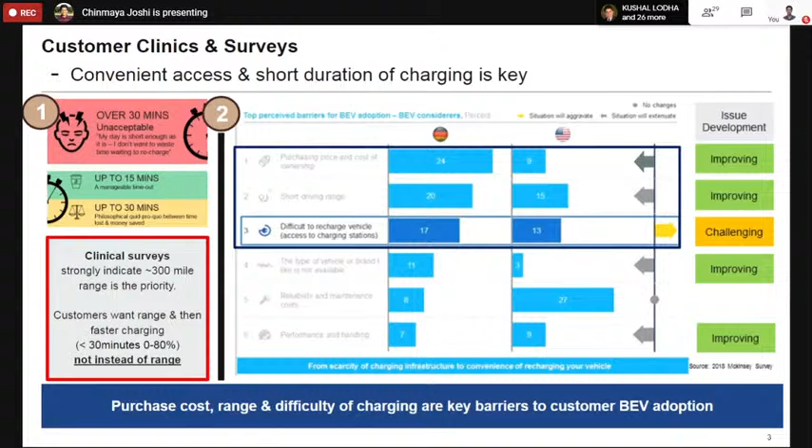So some of the evidence from early surveys that BMW, Nissan, Porsche, Audi have all come together to do is around where and how much charging people do. So typically in a household setting or a workplace setting, household as in when you buy a car, you're naturally given an option to install a charger at your home. Or if you're working, you typically go in and you park your vehicle and plug it in. It's nowadays a very common scene in most of the Western geographies.

So those typically range between 3 to 22 kilowatt. So that's AC charging. It can either be a slow AC charge, it can be a fast AC charge. Then there is DC charging as well, which typically you won't find in a household setting, but it would be in your workplace or places where you go for spending more time, like shopping malls and hotels and any other hospitality areas, or consumers in urban fleets such as Uber or taxi fleets. So those are typically ranging between 20 to 25 kilowatt, and the typical charging time there is 1 to 3 hours.

And then there is fast charging stations, which are basically centered around retail parks, grocery stores, smaller restaurants, etc. Those will charge about 80% of your vehicle in 90 minutes. And then there is HPC, very high power, very expensive to maintain, starting from 150 all the way to 350 kilowatt, very high DC power, which basically will charge your vehicle under 15 minutes.

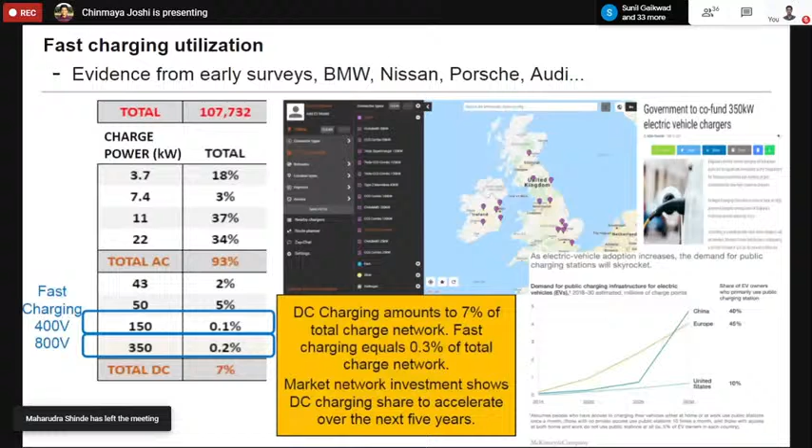With 800 volts, that mark goes significantly higher to about 4.5 kilowatt hours a minute, which is almost twice that. So you can achieve almost twice the amount of charging with the same infrastructure, but at a higher voltage. So even with AC charging, if it is at 800, you would be able to achieve a much higher performance on your charging system.

So below are some of the estimates and the actual numbers of some of the OEMs. As one can see, an average OEM as of 2021 will be centered around 2.1 to 2.3 kilowatt hours per minute. Tesla is already ahead of that with 2.5 kilowatt hours a minute.

And the industry leader at present, although I think this slide is a bit outdated now, is Lucid Air. But when the slide was made, the industry leader was the Porsche Taycan at 4.6 kilowatt hours a minute. Lucid Air currently has the market's leading charging system adopted on a vehicle, which is about 5.3 kilowatt hours a minute.

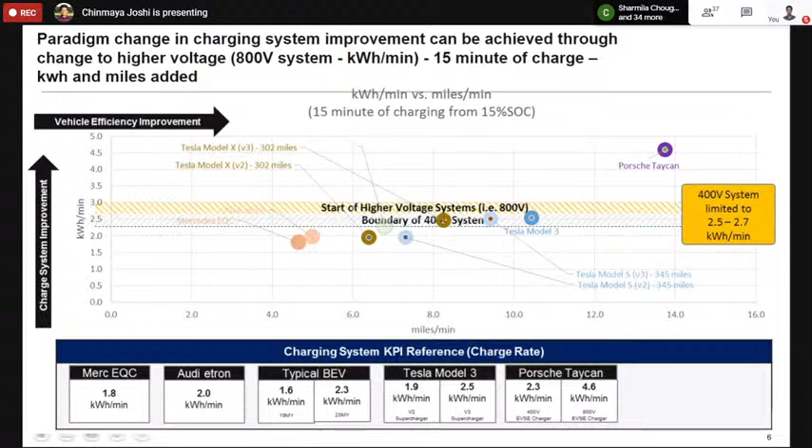So the point is, as the efficiency of the vehicle improves and as the charging system improves, we would be able to offer customers a better charging performance at the same cost and with the same infrastructure. So the idea is to try and hit a 15-minute target as fast as we can in order to continue our foray into electric vehicles going forward. That's the target we work with.

So what are the other advantages that we have with increasing efficiency? Today, when a typical consumer charges the vehicle, the biggest problem with battery electric vehicles, when you charge the vehicles or leave the cars on standby, is not actually with the high voltage battery. It's actually your low voltage battery that goes flat. And that has been a major issue across all OEMs. Take Tesla, take Jaguar, take Land Rover, or even a Volvo or any other vehicle, even if it's known for reliability.

The reason for that is power electronics requires significant cooling to keep it steady. Charging will increase temperature. It activates the fans. And if a vehicle in standby has cooling fans going on, it drives the low voltage battery almost flat. And that has actually been a big warranty increase on vehicles. The major reason for that is power electronic switching increases temperature at the junction, causing fans to go on.

And that has been an issue that the cooling system has not been able to cope with, because even to activate a cooling system, most of the premium architectures will be on an HVAC-enabled water glycol cooling system.

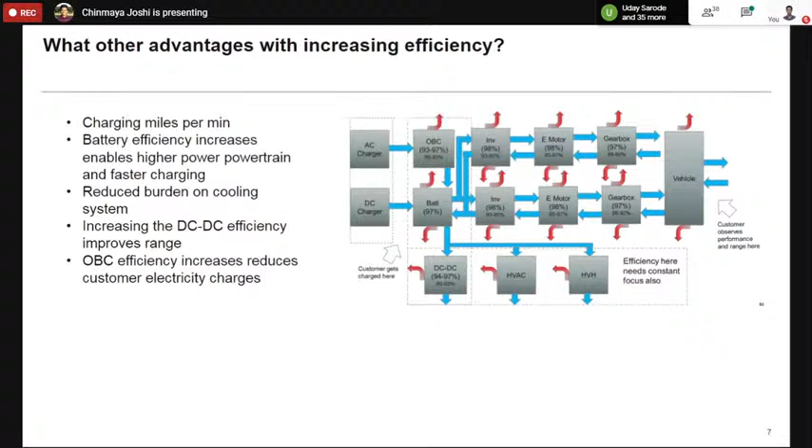The other issue is that with increasing inductance, you also have an issue of transient voltage, which is giving us a lot of problems in field as well as all OEMs, causing componentry to go out because of high current inrushes. So with voltages going higher and higher, one, we will be able to give more performance, but at the same time, the current reduces, therefore reducing our risk towards effects like transient voltage issues on the vehicle, and therefore warranty spend on components, and also recalls around that.

Moving to the next section, so I tried to talk about what are the typical expectations of the consumer on charging time, what evidence do we get, what is the utilization, and how does shifting to 800 volt offer better. Now, I'll talk about the 800 volt system. I'll first talk about the platform in 2020, then I'll talk about 2025, then I'll explain the difference between a battery electric vehicle and a plug-in hybrid, because I think battery electric vehicle is still not mainstream across a consumer's purchase interest. They would typically go for a plug-in hybrid even today. And there's a difference to how both are progressing.

One is moving towards higher efficiency, higher performance, and the second is more moving towards cost focused, trying to reduce costs as much as it can so that they can package more and more of range and features along with the IC engine into the vehicle. And it's a simple logic there again, because with a plug-in hybrid, you have your electric traction system and your ICE traction system, and you want to offer both at almost the similar cost of a diesel. So you will have to despec both of them. So you won't be able to really optimize either of them to premium performance.

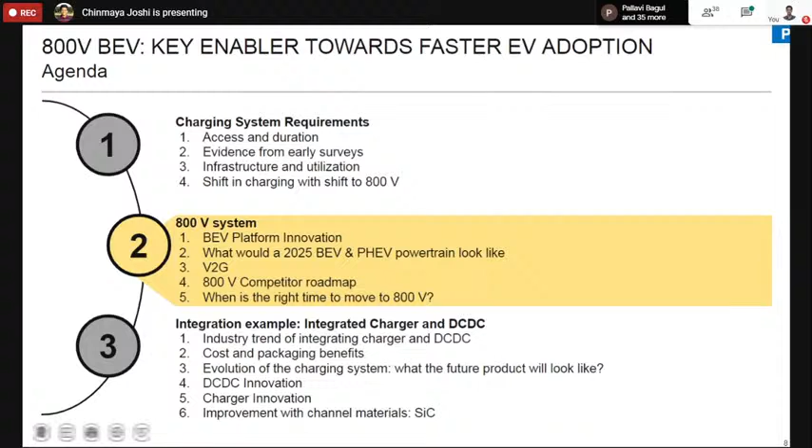Then I'll talk about vehicle to grid and how it's posing challenges for design and what it means in terms of costs. And I think these three topics will also try and give some direction to why I've chosen the example of charger later on, which is the onboard charger and DC-DC. And I'll then talk about the competitor roadmap, which is basically how different OEMs are approaching this topic, what are the typical timeframes, which models are coming across on these architectures. And towards the end, I'll quickly show through a drawing what's the right time to move to 800 volts.

And then you have your components, which are all distinct. So you have a different junction box in which you get your DC link from the battery. That has a connection to your onboard charger. You have a separate DC-DC system.

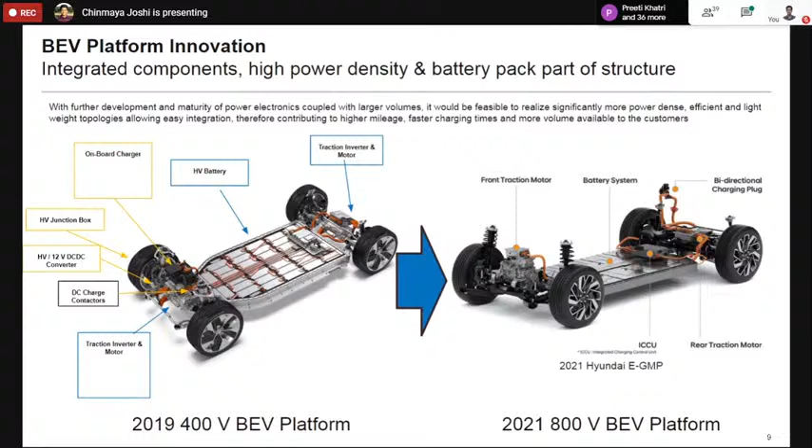Lucid Air is the vehicle that has been in talks everywhere, and it's been a proper case of innovation across all components. Before Hyundai came with the cost optimized future platform, Lucid is more of a premium advanced platform. It sits on a 900 volt architecture. It offers about 1000 horsepower of traction power. And just to give a typical comparison, a standard Honda vehicle is about 120, 130 horsepower. So we're now sitting with 1000 horsepower with an electric vehicle sitting at 900 volts.

It's available at the same cost of a Tesla, and they have integrated exactly like what Hyundai has also done, which is the batteries part of the structure. You no longer see inverters here because they are now integrated as part of your machine. Those are now called compact drive units.

The planar architecture is taken off and only the control board sits outside. The power board is actually integrated in the motor housing itself. So you have your power board, you have your rotor, and you have your transmission on the other side, all sitting in one axis rather than your inverter sitting on top of your rotor.

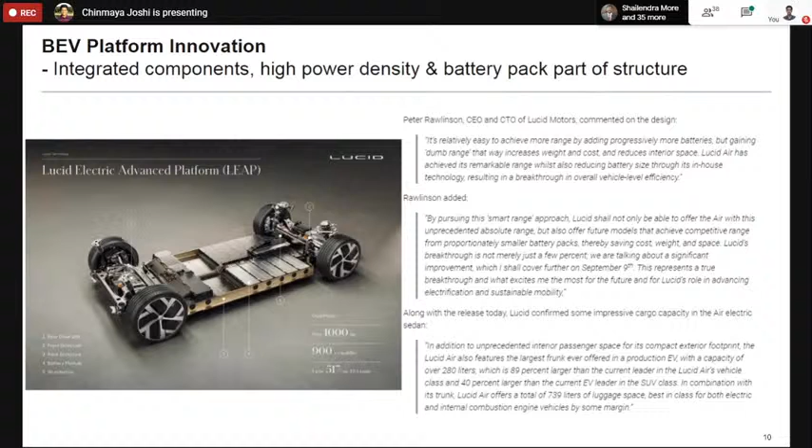Now, what would a 2025 electric vehicle look like? By 2025, we anticipate we would have to offer both 400 volt and 800 volt capability on the battery pack, which means that you would have a mix of charging, which is both 400 and 800 volts. What that means for the vehicle, and this will also give a good idea of how we have to design our componentry to the attributes.

So the consumers would have a mix of 400 and 800 volt architectures and infrastructures available to them, which means our contactors would have to be switching between creating a 400 volt configuration on the battery and an 800 volt configuration on the battery. And based on understanding the infrastructure, our communication has to get the contactors to align and realign and allow the charging to happen, to try and give the consumer as much benefit as they can with the infrastructure that they have.

So as you can see, because the infrastructure is complex and difficult to raise, it is also increasing complexity on an OEM to design the component to meet both 400 and 800 volt systems. With chargers, we still see, as I said earlier, AC charging is dominant, and even with DC, most utilization is under 20 kilowatts. So 11 kilowatt OBC is the standard being used and will continue to be standard. Everything above that will be an option fit. I explained option fit earlier.

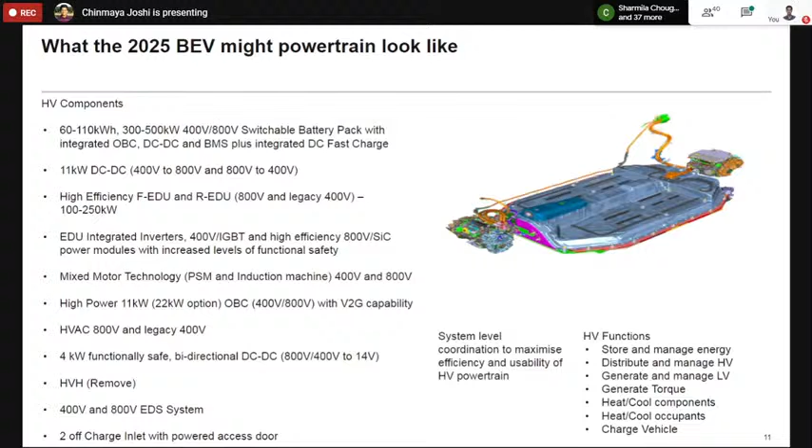Now we'll look at the PHEV vehicle, which is a plug-in hybrid. So this is going to be slightly different. The industry estimates that it will be still at 400 volts. The charging system still will remain 11 kilowatts as per the use cases. The rating of the machines will go down to about 60 to 80 kilowatts at 400, and that's primarily because the PHEVs will be used only up to about 40 miles per hour speed limits, and then the ICE engine will kick in, and that's primarily because of cost reasons.

Because the higher the kilowatt, the higher we'll have to spec our switching MOSFETs, and therefore the power boards will start getting costlier. It's a very linear relation of dollar per kilowatt. As your kilowatt goes up, your dollars will go up on the component. So I think there will be cost cutting starting to come there on the kilowatt rating of your machine, and with the new work happening with suppliers like GKN and ZF, the transmission on the IC engine itself is having this 60 kilowatt machine being packaged into it.

And the benefit of that is at cold start, you can start with your machine. Today, you still need to rely on a starter motor in minus 15 degrees Celsius. You can't use your machine because it is belt driven. So if you have your machine integrated in the transmission, you don't need a belt. Therefore, you're able to delete your starter motor and other components which take a lot of current, a lot of wiring system burden of your car.

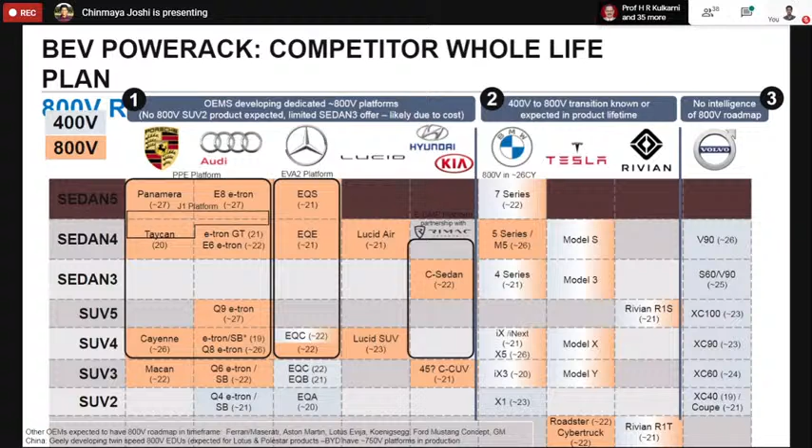Same is with Hyundai. Volkswagen goes very high, 10 million, because they've got Porsche, Audi, Lamborghini, all those brands with them. Lucid is a very, very premium brand, so they will sell at higher cost than most of the other architectures. And that's a major driver towards achieving 800, the cost today.

But the other element is when we move to 400 volt silicon carbide, you also get about 3 to 4% improvement in efficiency, and that contributes to 3 to 4 kilowatt hours of battery. And each of that contributes to 300 to 400. Now, where does that number come from? It's not just the cells, it's your packaging, your manpower, your assembly, your structure, weight, efficiency, all of that put together. The net impact on the car is 300 pounds.

That's basically 100 pounds per kilowatt hour, typically the impact that you have in around 2025. Today, it's even higher, about 180 pounds. But this number also includes the reduction in the cost of cells. And with that, we look at 100 pounds as typical per kilowatt hour. With every 1 kilowatt hour less we have to spec the battery, we save 100 pounds on the vehicle. And that's a very important number for an OEM.

But when we move to 800 volt silicon carbide, which is not available right now, the cost goes even lower, because then the current goes down. So the creepage clearances and all other areas around silicon carbide packaging are significantly reduced. So that 400 increase now comes down by 600. So we start saving 200 pounds on a vehicle. Compare number 4 with number 1, we actually start saving 200 pounds per car, but that's still far away. And silicon carbide cost reduction is moving steadily along as the dies become more and more efficient.

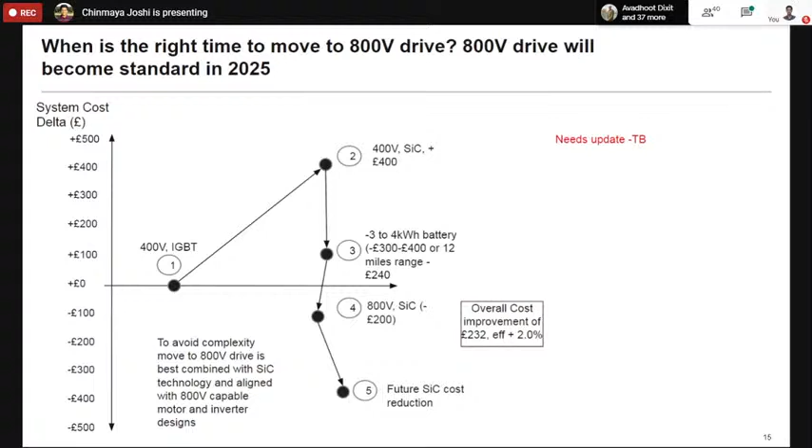With silicon carbide, you can achieve more efficiency because the channel width is high, so you can have more electrons flowing in your channel as compared to silicon. So I'm just trying to give a simpler explanation, although one can spend more time. But moving on, I just had a video that explains about an upcoming platform.

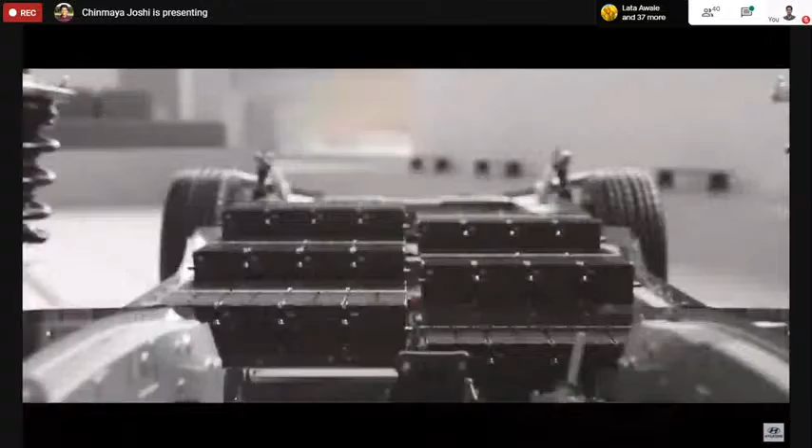See, only the battery packs are packaged. There is no battery management system. It's only the cells, and they're part of the structure.

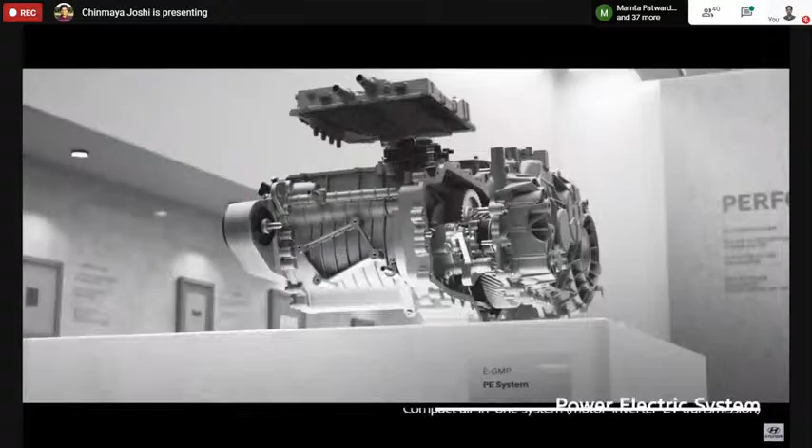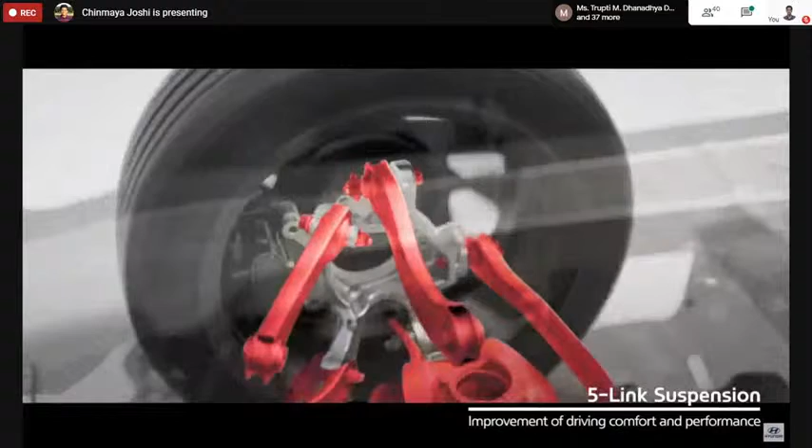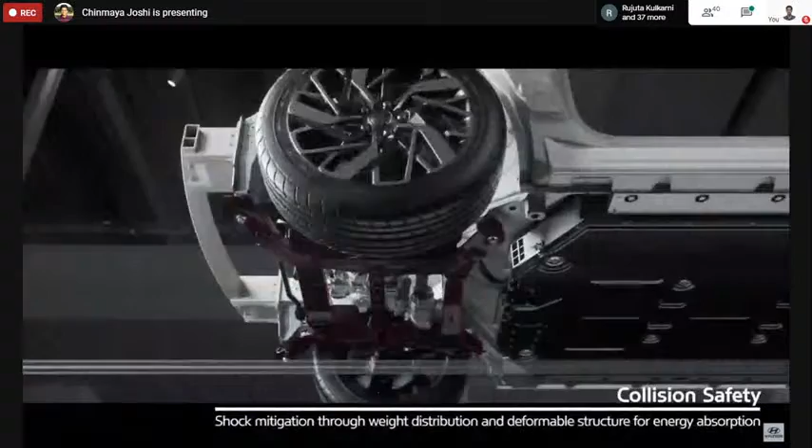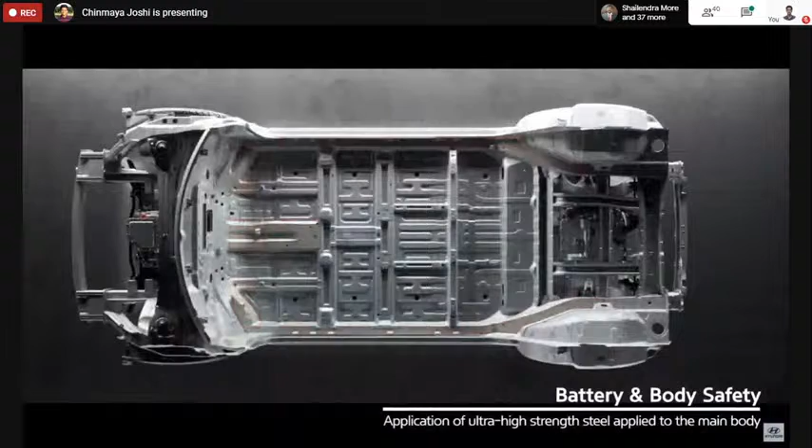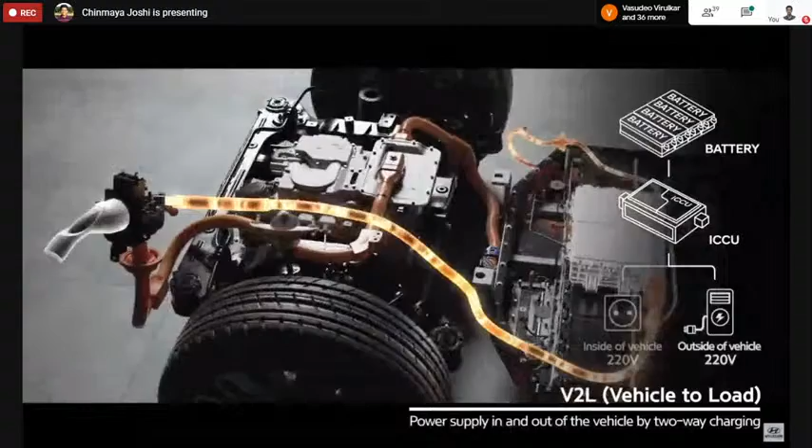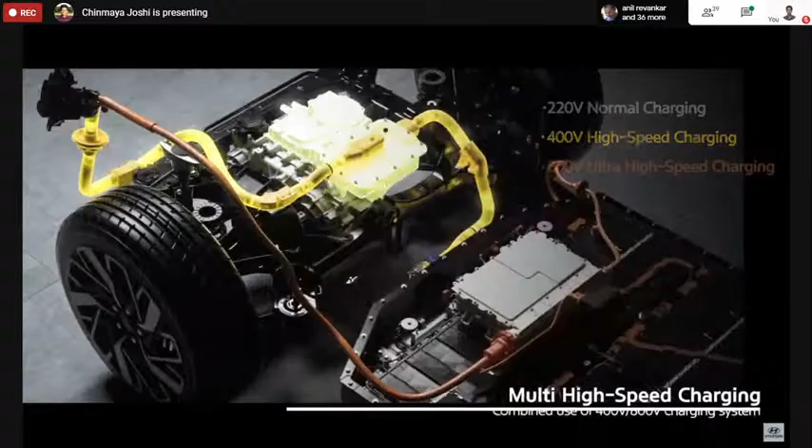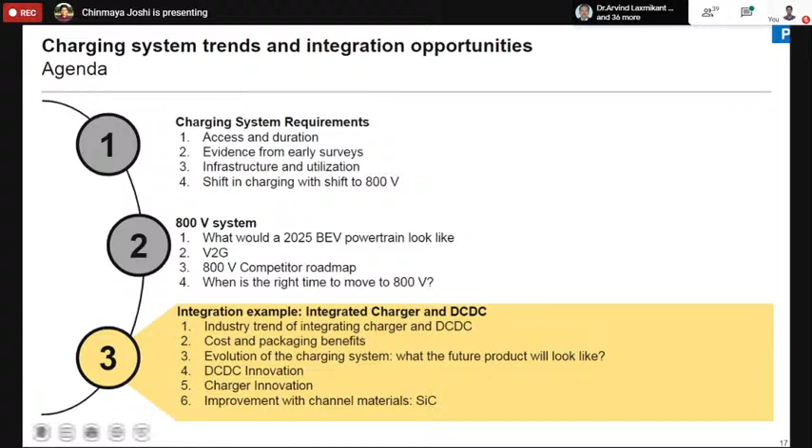Right, moving on. So I'm coming to my last section, which is a case study of an integration example. If you saw in the last part of the video, it talked about a charger and a DC-DC supporting 400 volts, 800 volts, feeding back to the grid. And I'm going to explain a little bit on that as a case study. Why is there an interest in going towards an integrated charger, DC-DC, or a BMS as well?

So trying to eliminate the harness improves cost. Cooling connections become easy if you have just one cooling plate across your components, and having just one microcontroller rather than different microcontrollers. For example, today you have a separate microcontroller for a charger, a separate microcontroller for a DC-DC, and a separate one for your battery management system. So all of them have to talk to each other.

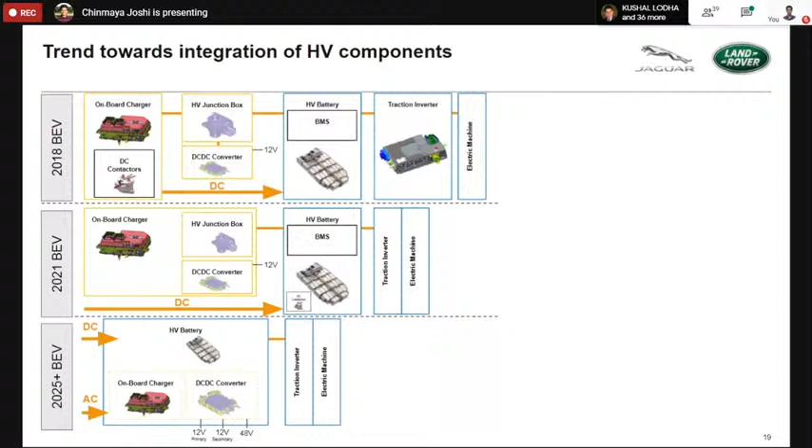This is a typical block diagram of what I was talking about. So your onboard charger, your DC-DC converter, your BMS and master control across your onboard charger and your DC-DC will all be integrated inside of one box. That would include your contactors as well. And the master controller will also define how the contactors align and realign to change the configuration of the battery.

So the bus bars on the battery will change as the contactors change their alignment inside this box from 800 to 400 volts. So this shows the AC charging use case and your DC charging use case into the contactors, AC charging directly into the onboard charger, converting AC to DC and going into the battery, with your consumers still being fed power through the contactors.

And with an integrated approach, you could actually use the battery's cooling system, and this saves money because you don't have to design a separate cooling system. So you can have just two inlets coming from the battery itself, which takes the battery cooling fluid into this component, cools it, and then gets recycled across your compressor in just one recycling system. So you save money on your coolant channels as well.

And all of these small things seem small, but actually they add a lot of value and cost. The mechanical aspect of it adds a lot of cost saving on the car. And most importantly, your vehicle network as well.

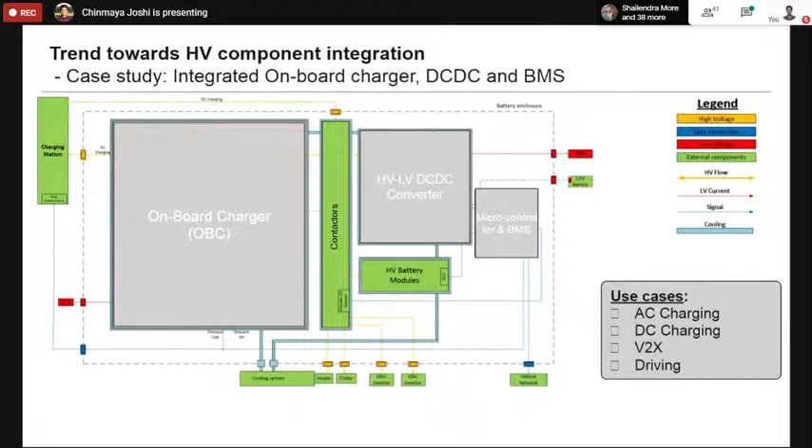So just to explain again in another format, the HV battery for 2025 will be having both 400 and 800 volt configurations on it. So the contactors will align and realign to meet that target. If you give an 800 volt DC gun input, it will align to 800 volt and take the charge in. But if the consumers are still 400 volts, like for example the inverter or HVAC, there would be a high voltage DC to DC conversion trying to convert from 800 to 400. And I think that's why the switching has to be more and more efficient as we move forward.

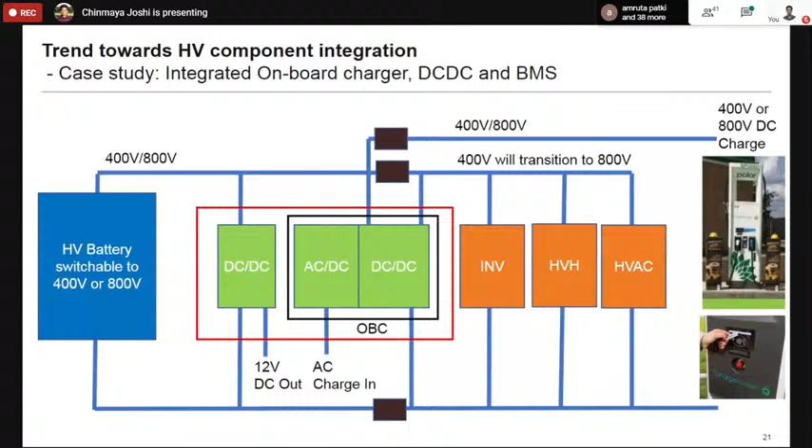So this diagram is just to try and explain what I meant by a master control board. So it doesn't mean that there will be no logic in these components. The onboard charger and DC-DC would still have it. Those will be more logic device based, for example FPGA based, rather than a full-fledged microcontroller. They will still get a command from the microcontroller. The main processing will happen in the microcontroller.

For example, the battery modules may just have the balancing ICs and a small logic device, which gets told by the microcontroller sitting on the main control board, "I think you are above your voltage, start discharge," and it will start discharging with the passive balancing approach, and then it will stop when it gets told to stop.

Similarly, another thing that is important to explain is in order to improve efficiency from what we saw, 80% to 94% earlier, these different onboard charger and DC-DC topologies will start getting converted into phases. What I mean by phases is rather than just have a big transformer coil and a big step down, step up phase, one would have multiple layers, each layer doing small elements of it.

So for example, nowadays a standard is 4-phase DC-DC. So each phase is doing 1/4 of your conversion. That all adds up, and that's basically done to reduce your switching losses on your MOSFETs.

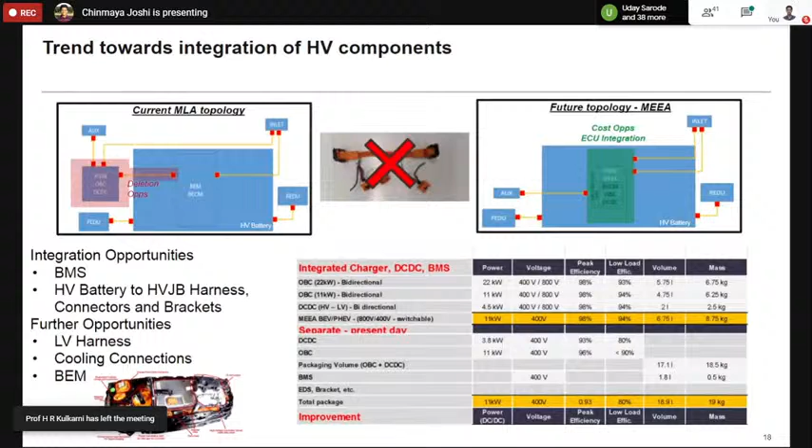So it is power on demand rather than always on. And that's an important statement. Power on demand is basically, as the demand grows, we will give more power. Whereas today, we just keep it on all the time and we just use less power. And that's why this efficiency of 80% here starts going to 94%, because we'll just switch off those devices which don't need to be on. We'll just keep maybe just one phase active for a low load condition. I think these are some of the new things that are coming across electrical architectures.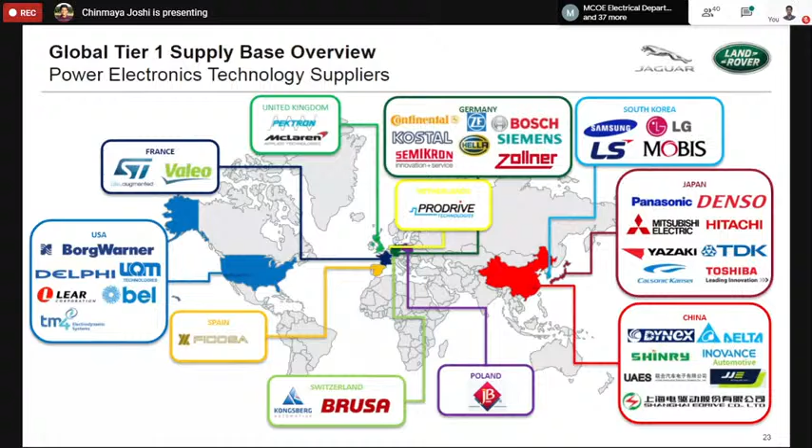So what I was trying to explain earlier was you would have multiple phases, and to explain that a bit more, with planar magnetics, you would have your magnetics mounted on your PCB rather than your coils and chokes sitting separately, or your transformer coils sitting outside your PCB. Now, you will have them mounted on your PCB, and they will be assembled as part of your pick and place process.

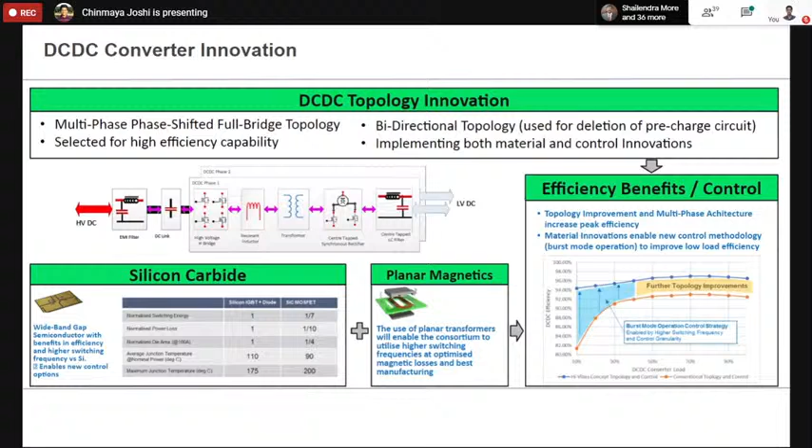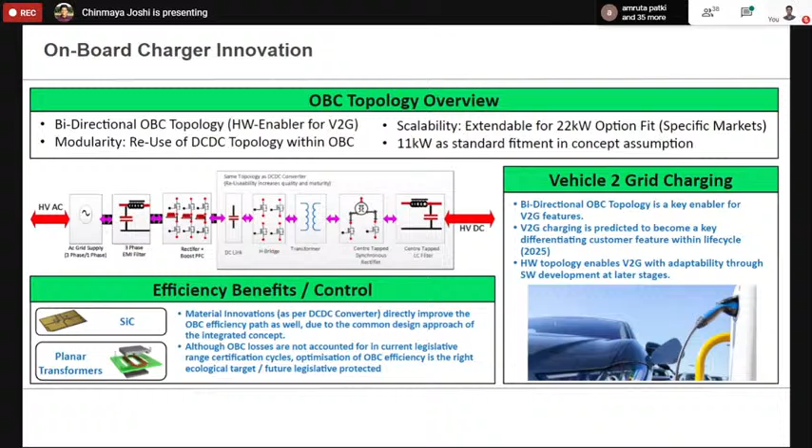Similarly, with the onboard charger, your power factor correction, transformers, planar magnetics will get mounted on your PCBs. It will save more space. And with silicon carbide, it will also help improve its efficiency further. So these are some of the things, and with chargers with higher efficiency, you will be able to offer bi-directional topology. So that will help in vehicle to grid offering on the vehicle.

Then I'm coming to the last couple of slides where I'm talking about silicon carbide. Silicon carbide is not fully ready yet, and the primary reason is the die sizes are very small today. They're 1/4 the size of a typical silicon wafer that goes into production, and that really affects the cost, and that's getting improved. As it improves, one would start seeing more and more adaptability of silicon carbide with reduced cost. The other thing is that the junction temperature of silicon carbide is much higher, so it will be more efficient across a higher operational area on a time versus performance graph.

And I think other than that, it's more of talking about how the production scales up really. So ROHM is one of the leaders in silicon carbide. With their estimates, they've already started lining up their assembly lines for 2022. As an example, ST is coming heavily.

So Tesla Model 3 was the first car which had silicon carbide MOSFETs. Not everybody knows that. So ST Gap was custom designed for a Tesla Model 3 by ST Microelectronics, and they are right now also leading the silicon carbide. And Tesla has been actually driving, to be honest, the adaptability of silicon carbide. And if you get a chance, try and have a look at Tesla's silicon carbide MOSFET approach to the inverters. It has been quite ahead of the curve, at least 10 years ahead of the curve at the time Model 3 came in.

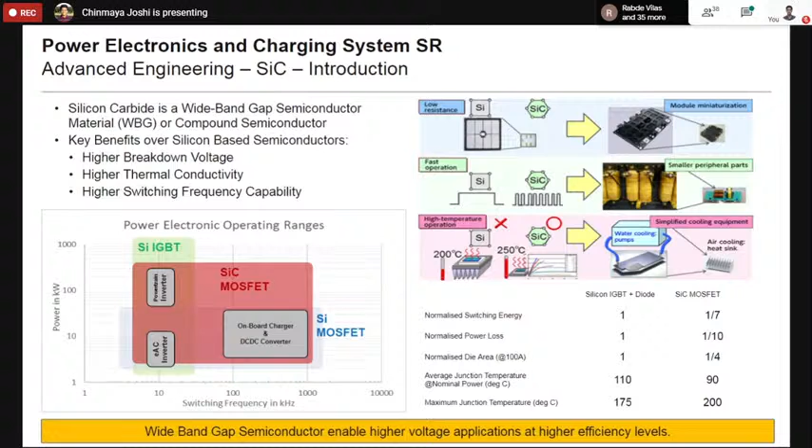So as I said earlier, ST, ROHM are clearly some of the leaders in this. Infineon, Cree are still falling behind, but the other area on silicon carbide I forgot to mention is silicon carbide also handles transient voltage use cases better. What I mean by that is silicon is slightly slower to handle dV/dt losses, the energy flow through the controller. It takes time for it to detect that, whereas silicon carbide is almost instant.

That is why it will be a very big boon to all automotive companies, because today when we have a transient voltage coming, for example, if you suddenly lose a contactor under load, that energy has to go somewhere. It typically travels through your component, and your MOSFET is slow to detect it. As a result, it will burn your capacitors out, or it will cause a fire incident in the car.

With silicon carbide, we will be able to see that transient spike, and therefore try and kill the spike through an active clamp or an active short to the body of the component, to try and save the capacitance from being lost on the vehicle due to a burn event. So that's basically trying to give some input on silicon carbide, and with that I come to the end of my discussion.